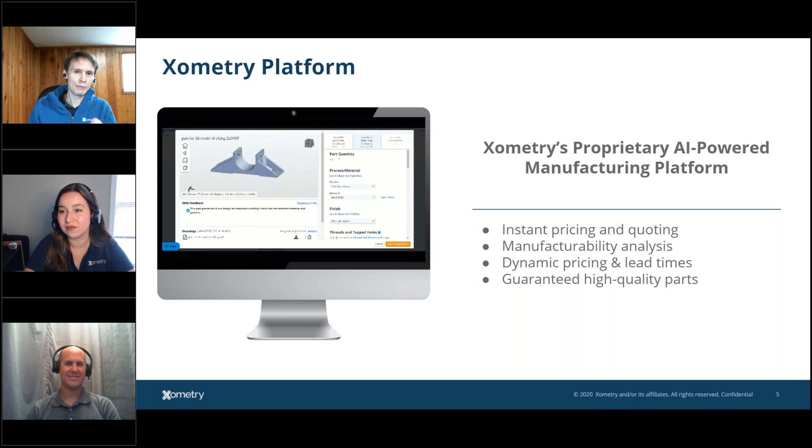So we guarantee the quality and timeliness of your parts. The way that we do this is really unique. We actually have a marketplace of professional manufacturers distributed across the US that we have vetted through Xometry's online platform. So we have shops that are small and large. We have machine shops. We have tool and die shops. We have 3D printing bureaus. And we're able to match the needs of your work, so what makes your project most successful, with those manufacturers that are best able to complete that.

When it comes to injection molding, that could be a bridge tool, so shops that like to do these lower volume bridge tooling designs. That could be prototype tooling, or that could even be full-scale production tooling with the gamut of qualification needs that you need to make your project successful. We have this diverse distributed network that allows us to take on multiple projects at a time and multiple projects in parallel for you. So we can really do a lot of work, not just from the diversity of experience, but also concurrently for your project needs.

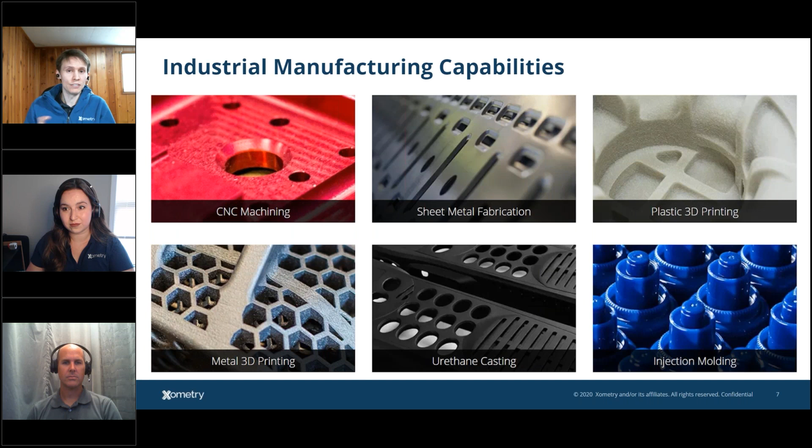And this goes down to machining, sheet metal fabrication, plastic and metal 3D printing options. In fact, for 3D printing, we have 7 different 3D printing technologies available. So if you've used us for 3D printing, you may have seen that gamut there. Urethane casting, and of course, injection molding services. So today, though, it's about molding, and we are happy to talk about it. So I'm actually going to bring Kyra in now to talk a little bit about this experience with molding with Xometry. Kyra, first off, why would I choose molding? And then, what makes molding with Xometry such a good experience?

Oh, Kyra, let me get you. Okay, can you hear me now? I got you. Okay, sorry about that. I think we were both clicking on mute at the same time there, so it's like a door lock incident.

No worries. So yeah, like Greg said, we are talking about injection molding today. As Serena noted before, my background is specifically in molding. I've studied it for several years now, with some background in automotive and everything like that. But I'm happy to bring my experience here and discuss with you guys some general tips about molding. So all in all, injection molding is the cheapest process for a high volume run of parts. Over time, given a simple cost analysis, you'll see how it compares to a process such as 3D printing or something else that we may offer on our platform as well.

It is the most consistent and reliable process over time as well. It is the most repeatable in regards to holding tight tolerances, even to the extent that you don't have to have an operator standing there for every cycle, depending on the part complexity and geometry. So, all in all, it is a repeatable, high volume, scalable process. Even mid to high volume. I know here we offer some prototype tools as well. If you need certain material requirements or properties that you need to test for your application, or just want 100 parts here and there, we are happy to provide a solution for that as well in regards to molding.

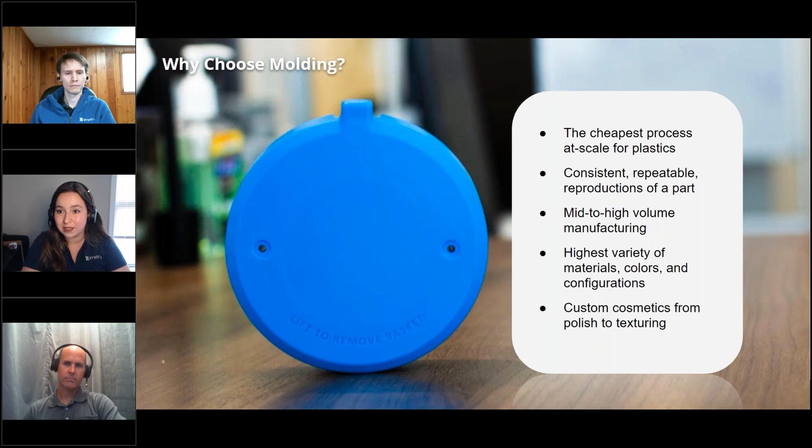Yeah, and I'm getting a little bit ahead of this, but one of the most common questions is, do you mold X material?

And our answer is almost always yes, because we are actually sourcing these materials specifically for you. And I know I'm segueing into that, but that is a question I get very, very frequently: do you mold X? Yep, yeah, we do. Absolutely. And that kind of steps into our have it your way approach.

So with the material, we don't have any material limitations. As long as it's available in the manufacturing location, we are able to source it. There should not be any issues there. We are not limited to what's shown on our website. We can source just about anything to fit your needs. So that is definitely a privilege that we have and definitely take pride in.

But along with the have it your way approach, there's really no design limitations or restrictions that we have in place either. All we want to do is help your part be more moldable, and we want to get it as close to your design intent as we can in regards to producing a part, to make your dream come true, essentially. I know that's a little bit cheesy, but it's true. So we pride ourselves in taking it from start to finish.

So we do offer long-term solutions and not just prototyping as well. So if you do scale up at a very high rate, we can offer those services too. Just taking it from a design intent, like I was saying, to 3D printing, to now low run injection molding to get all the bugs out. And then we can also support the high run volume as well.

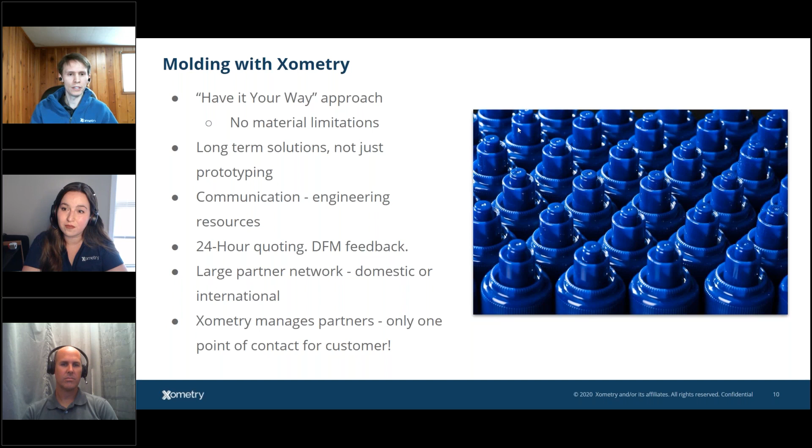So one of the things, and I was speaking a little bit about this with Kyle earlier, is we're about to go into design. My experience has always been: know the process first, and it's going to help you get more intuition about why these design principles are needed. So Kyle, we have some slides set up here, and I was wondering if you could walk through just some of the basics of molding.

Absolutely, yeah. So obviously the biggest thing is to understand what is going to happen and when it's going to happen, so that you can be informed of the whole process. Every tool is cut, every tool is designed, as Kyra mentioned, to your part. It's not an off-the-shelf part. Everything is custom made, and it's not just to your part, it's also to that specific material. So with the thousands of materials, you could have several different options in your tool requirements.

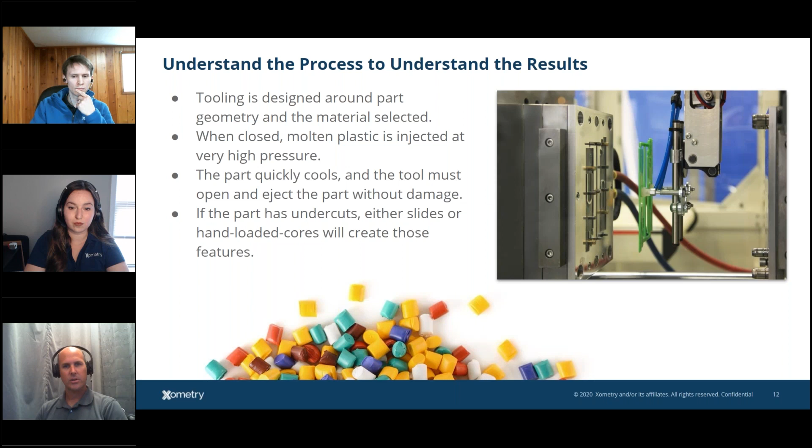And I got the little thing here. I'm gonna skip ahead. Perfect. Like 1, 2, 3.

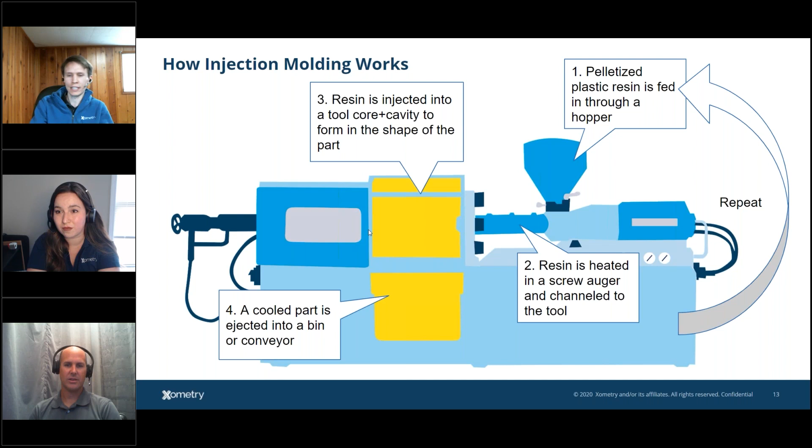All right. And this becomes important because we have some other things talking about what adds to the cycle time, because that really is a measurement of throughput, right? So how many can I produce per day, and what can we do to make more parts? Absolutely. Yeah, and there's a lot of terms you're going to hear.

I mean, not just from us, but from anybody. You have single cavity tools. Obviously, single cavity meaning one part. So every time that mold opens and closes, one part's going to pop out of that tool.

Family tools itself, it's a good, easy way to maybe keep that tool price low. Sometimes you can put 5, 6, 8 designs into one big tool. Sometimes you can't. It just depends on the geometry. But it's, again, a good way to put all designs into one tool. If it's different sizes, you may have to have a runner shut off, so only one part will run at a time. So you're not really necessarily saving on your parts, but you would be saving on the tool.

Multi-cavity tool, so again, if you're going into high volume, if you're needing call it hundreds of thousands or even millions of parts, you're going to want to look at high multi-cavitation tools, 2, 4, 6, 8, 16. I mean, there's a lot of variations on what can be done with these multi-cavity tools. As I mentioned, the side actions or slides, again it's a mechanical component that actually captures holes in the side of the part, that's not something that's captured in that direction of pull.

Gating, again, that's kind of where material itself is actually injected into the tool, into the part itself to help fill it. That vestige that's left over, that little piece of plastic that's hung out on the part, has to be trimmed to leave you a nice finished flush part.

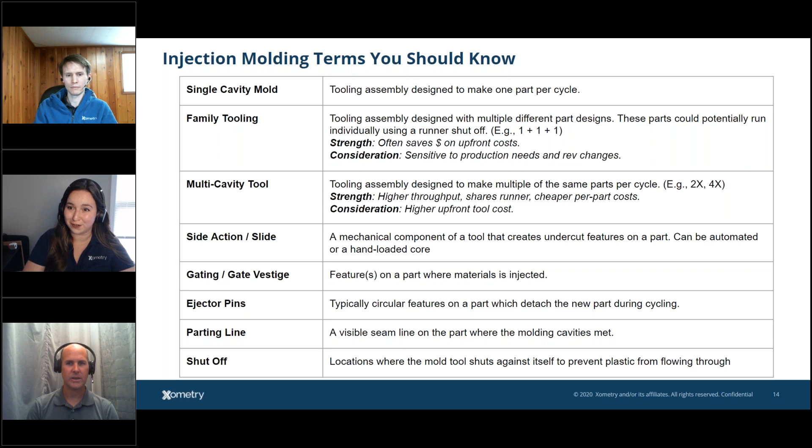And at the same time, sorry, Greg, it's important where the gate goes, because it depends on how your part fills. So it's very critical where it goes in regards to what you want your part to look like afterwards. So one, it's critical with how the material flows, and two, it's ultimately your discretion whether you approve of the location that we choose. And I know we have this question a lot too, especially when we're talking about that prototype or bridge tool versus a production tool.

So we made this little graph, but just when would I choose? First off, what are hand-loaded cores versus automated slides? Why would I choose either? Or, what will we do to help recommend the right approach for you?

A lot of that will depend on how many parts you're actually going to need during your run. If you're needing hundreds of parts at a time, hand loads could actually be a better benefit for you. But if you're looking for a true production, you're needing thousands of parts at a time, maybe need them quickly at a certain time frame, that's where the more automated slide would come into play.

As far as what a hand load is, the picture is actually a pretty good depiction of loose pieces. That's really what it is. It's a loose piece that gets fit into the tool, and as the tool opens, that loose piece is stuck onto the part, and an operator will stand at the press and remove that hand load, which is still part of the part. It's then taken off the part and installed back into the tool.

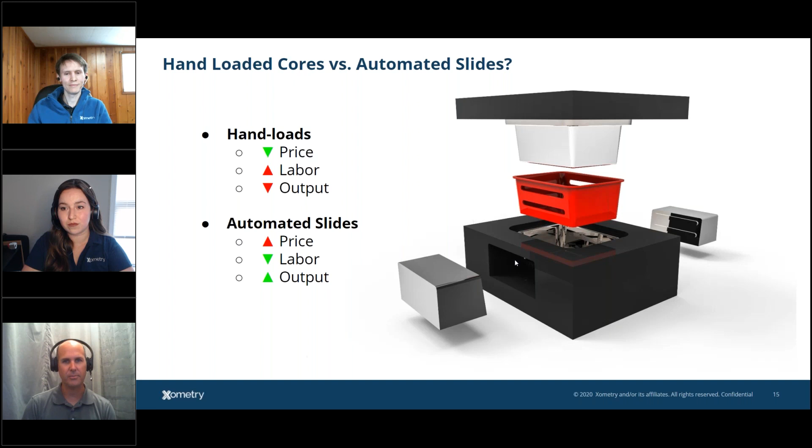So the reason we want to bring up the tooling and tool approaches is because you're going to be flowing molten plastic into this cavity, and this cavity is in the shape of your part. A lot of weird things happen when plastic flows into parts and then cools down. First off, hot plastic is expanded. When it cools, it shrinks down. So when we talk about design for manufacturability, a lot of that is around that plastic and how to mitigate some of these costs, including what Kyle mentioned with hand loads.

And we have this molding trinity that Kyra has emphasized over and over again. So Kyra, I'm going to let you take it from here: undercuts, uniformity, and drafts. Sure. If you want to take anything away from this call, take this away. This will help with all of your designs. It's applicable to every single injection molding design out there.

Any part you can buy off the shelf, any part you'll see in a car, any part you'll see anywhere, all of these 3 analyses apply to that. So what you're seeing on this image is the basic 3 analyses that we do and offer with every single order that we get through our molding department here at Xometry.

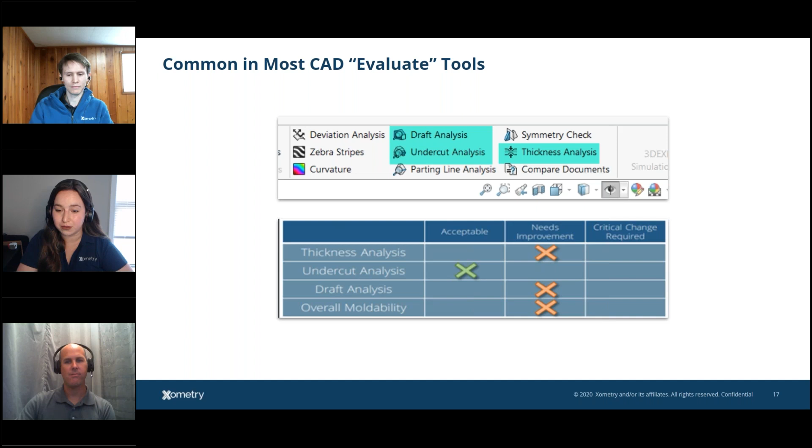So the first one is thickness, that you're going to see in the little checkbox down there. This is just a snip right out of our DFM feedback that we offer to you. So thickness analysis, undercut analysis, and draft analysis. We identify those, and then we identify the overall moldability of the part.

So the first one, actually in a different order here, is undercuts. What undercuts are is basically a feature that is perpendicular to the parting line or the direction of draw. You can see in that first image, it's that red circle. Same thing Greg is pointing to there in those red faces. We've done just a basic undercut analysis on that blue face, and it calls out everything that's in the opposite direction, essentially.

So what that means is, like Kyle said before, either a hand-loaded core or side actions are needed to form those features because they're not captured in the direction of draw. We aren't limited to those whatsoever. Xometry can absolutely handle most side actions and undercuts out there. That's no problem. But we do encourage you to evaluate your design and eliminate any if unnecessary, just because they do add some cost to the part. And of course, we want to make it most cost effective for you.

In most cases, like I said, they are achievable. However, in some cases, a die lock condition is encountered where basically there's two different side actions going together in different locations, and you can't really pull them out at the same time. So it creates an intersection where they're kind of locked in place. So that's what a die lock is. And that is not achievable with those standard actions that we talked about, so that is something you want to avoid.

And whenever you're doing these analyses, you can see where all the red marks show themselves and reveal where you're having an issue. That's the benefit of the software we have here in-house. We can call all of that out, and there's really no limitations there. So the best practice would be to minimize those: one, because it does reduce the cost, and two, it just makes your part a little bit easier to mold. And then something that's really awesome that we stress a lot are pass-through cores.

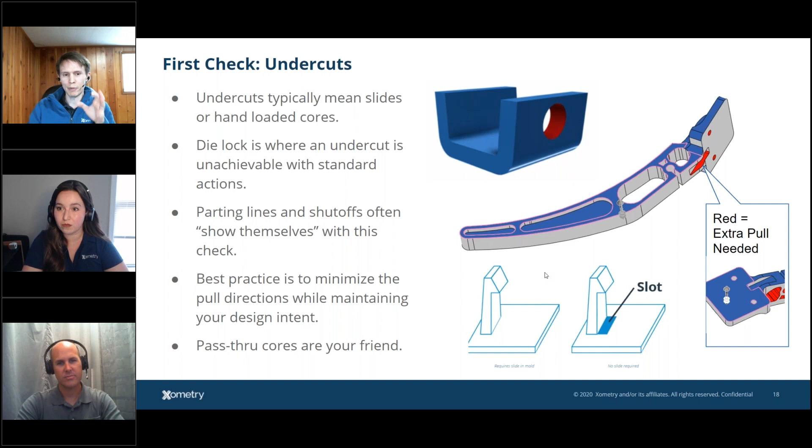So it's a really good way to save costs on your injection mold design, by mitigating as many undercuts as you can. And there's some really great tips out there, including some of the stuff in our design guides.

So one that can result in a sink. Like I said, a sink is just a minor indentation on the reverse side of the part that just shows, kind of reflecting the features on the opposite side. You can see these in your common plastic totes or garbage can or whatever in your house. They are present there. They are not detrimental to the function of the part whatsoever, unless it's very significant, and I'll get into that a little bit.

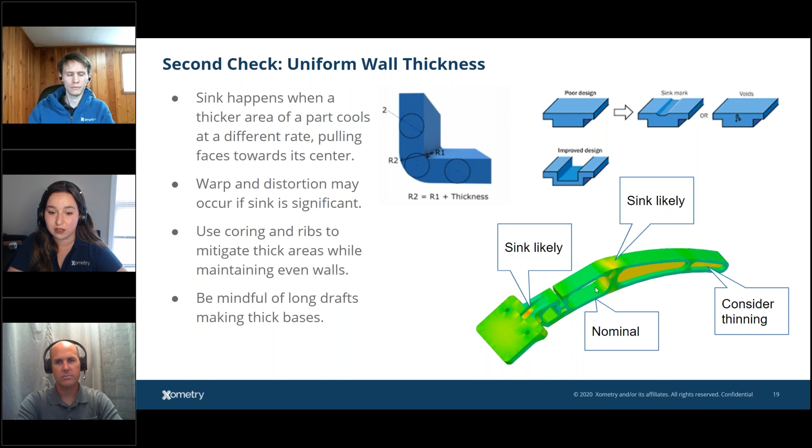And sink happens because basically it's your material shrinking together. It's pulling away from that surface because there is that big thick section there. So like I said, if it is significant enough or severe enough, it could cause warp, which could obviously be detrimental to the function of your part as well. So in order to mitigate those risks, we want to reduce the thickness of those areas and core out the features. You'll see that as well along this part that we have here.

So the last check that we want to do is a draft check. What this is, it provides ease for ejection. And we do that by just applying a minor angle to the outer walls of the part, as you can see in those images too. We need this to release the part from the tool because it creates a vacuum and it's really hard to pull off without it. If it's not there, it could result in drag marks or scratches to the surfaces of your part. And we obviously don't want that for your design.

Ideally, we like anything above 1 degree, just because more is better. But at Xometry here, some features we can get as little as a ½ degree of draft. But again, more the better. And you can see in the image that all the yellow surfaces on that leg there require draft. It either should be red or green.

Yeah, and in this image, by the way, the good news about a lot of these analyses is they are available in most professional CAD platforms. So if you're already designing in SolidWorks or Inventor, you're going to have access to at least that undercut check, draft checks, and there may be a thickness analysis. These images here are basically taken from a standard edition of a professional CAD software.

We highly recommend using that as frequently as you can when you're in the design process, especially when you're taking something from a 3D print to a mold, because thickness is going to be one of those first things where you're going to be like, hey, I don't need all this extra mass anymore, because you're not going to be changing infills and stuff on your part, and it's very easy to assess.

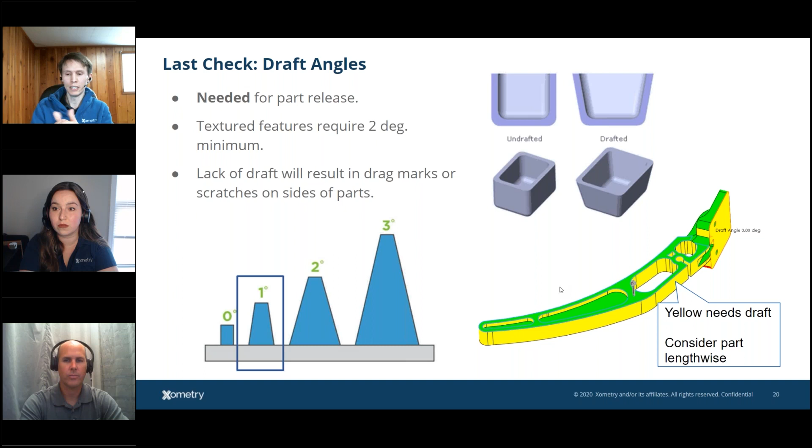Our team takes a further step, and we do more sophisticated analysis as well once we move into a finalized DFM on the part here. But I did want to say, these tools are common. A lot of times it's just knowing where to find them in the Evaluate tab of your professional CAD, but super, super useful to know where to check for those.

Mm-hmm. And this is kind of putting it all together. This design is actually a little drone leg that we use, and we print a lot of these here. But in this case, you're checking undercuts, and you're kind of looking at both sides, and you realize this is going to be a good center part. So if you imagine the tool closing and creating both halves cut into the tool, then this feature here would be created using a slide or side action.

But this part was put on a diet. Some coring's been made to remove some material, and all of a sudden your design's that much better for molding.

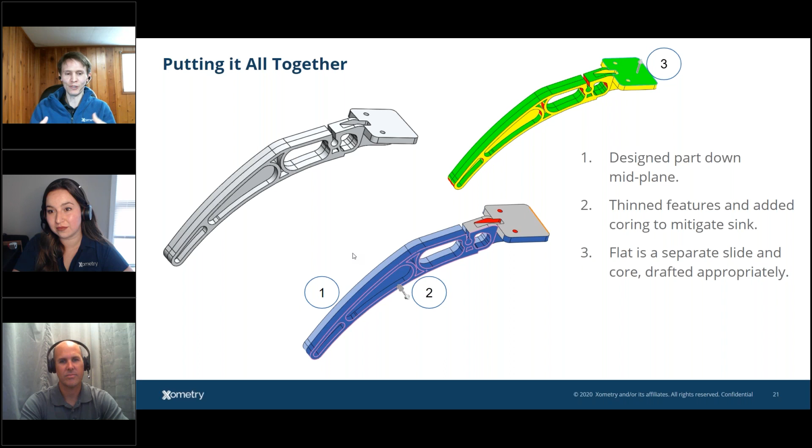And one of the things we want to emphasize is we can inject plastic into your original shape, but the outcomes of that are really large dimple-type features from that sink, and there's a lot of outcomes that we don't want you to do. Our goal is your success. So when we're talking about these design considerations, it's not a critique of the model. It's us thinking about those future outcomes when we're molding these parts.

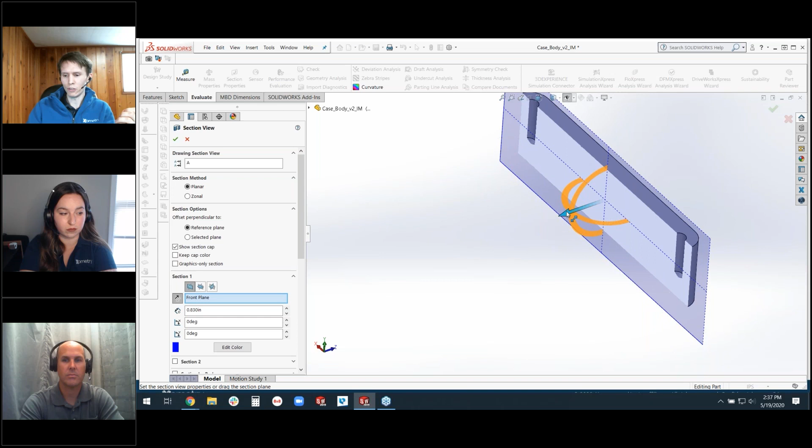So when I run an analysis on this, I'm going to very quickly see that I have some really thick, uneven walls here. If this was just straight molded, you would find sink almost to the point of deformation of the part. The pull of the sink may actually change the overall geometry and function of the part. So what you want to do is start thinking about how can I turn this into a more even wall thickness. Again, this is just the beginning.

This example here would be, hey, I have this part, I've made a dozen of them, now I need to make 700 of them. So how can I get from that dozen to 700 parts? So one of the first things I may do is take a look at what my functional side is. In this case, I have everything attaching from the top here. So I want to think about how can I remove material from the non-cosmetic or non-functional face.

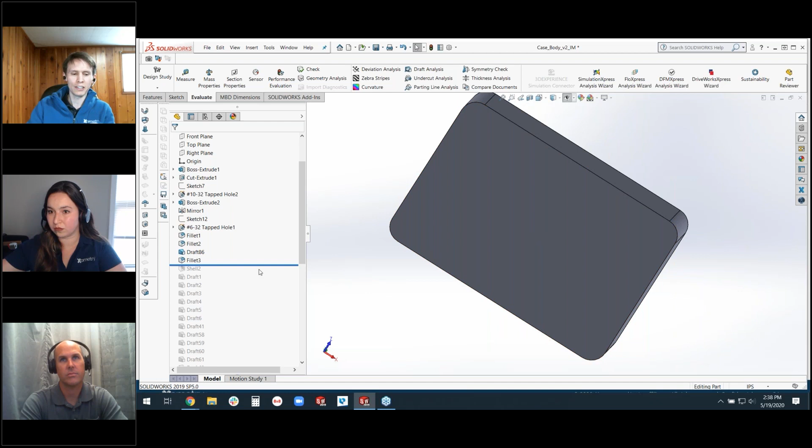In this case, I ran a simple shell command. Running shell across this all of a sudden gives me an even wall thickness across the entire part. And I'm already halfway there in making a part that looks moldable. When we talk about the next steps, it's about looking at my draft. I could do a very quick draft analysis and realize that, hey, right now I have 0 degrees on my pull directions.

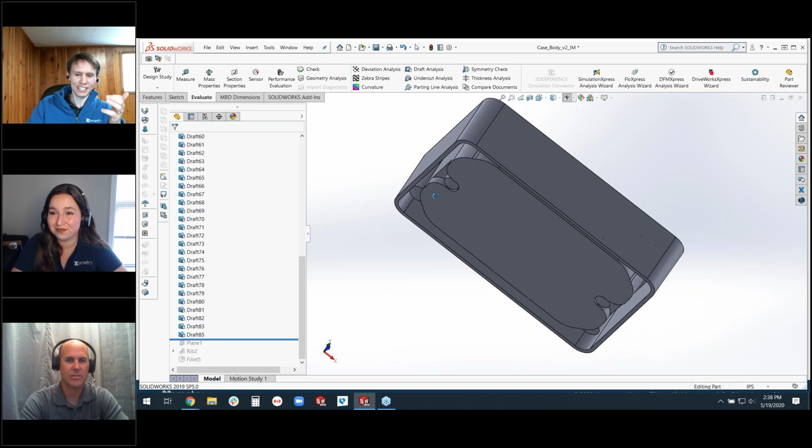I have already done this, because in SolidWorks I'd probably crash the computer if I didn't do this beforehand. But I've used a draft wizard and some manual additions here, and it's just very minor. But now I have draft in the pull direction so that this part will appropriately release after the tool's closed and plastic's cooled. The second that it moves a little bit, I have an air gap between my part and the tool that helps it release successfully. So applying that draft is very important.

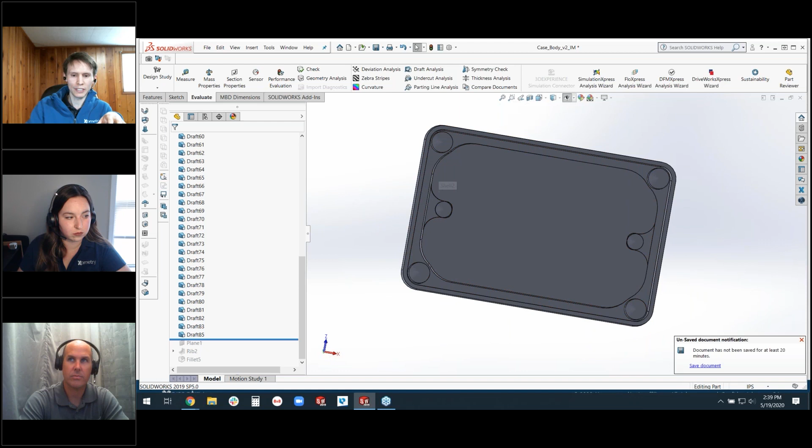The other things that I took a look at: so I do have this part. It is on a diet. It's got even wall thicknesses. A lot of times you want to stabilize a boss or a protruded feature like that. So I added a rib command, and now I have a little bit of stability on these, so since this is the install point, I may need that to be a little bit more rigid, especially if it has something installed to it.

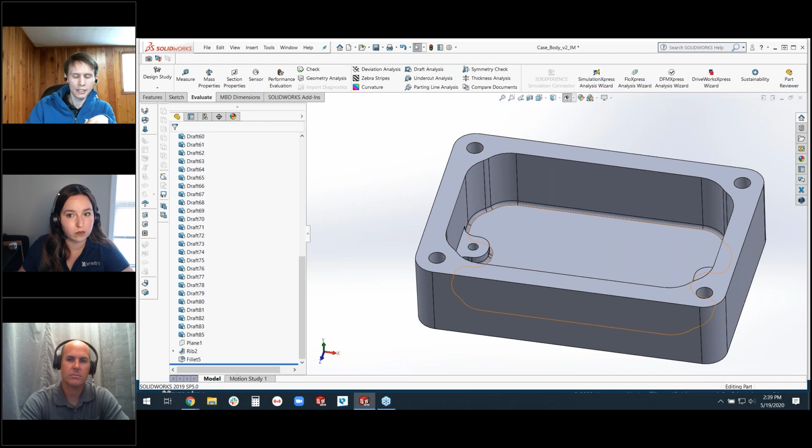And then the last thing that I have is adding some fillets, which, just like draft, help the release of that part. So in some very simple steps, I've taken something that would be very difficult to mold initially and brought this design to a point where I can do some limited scalability via injection molding.

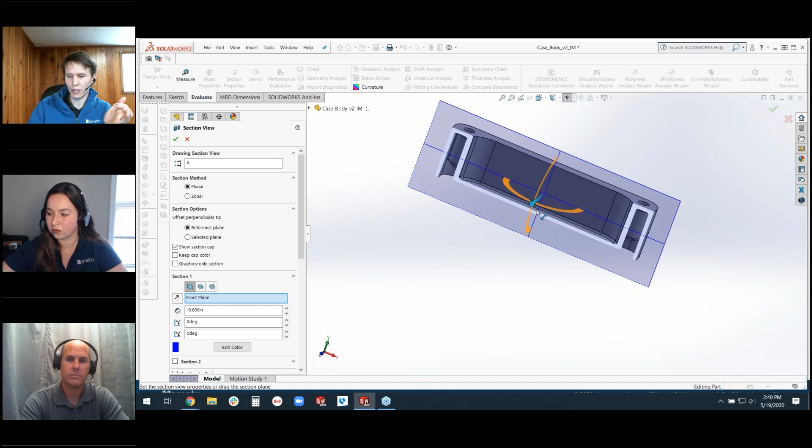I'd really like to show this example because it is something where it starts that mentality. The next steps of this is I may go back and take a look at this and really critically think, do I need 6-32 tapped holes? Do I need some of these external faces, or was it just convenient to grow this without supports this way? And you could start thinking about how your design may change and be optimized even further for molding.

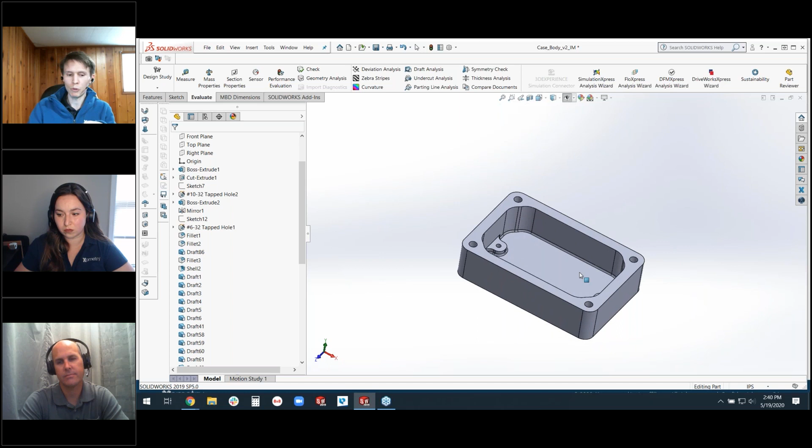But this design here, just some very simple things like using those shell commands, adding those drafts and some ribs when needed, especially across cored areas where you want to reduce flex. So adding some ribs for stiffness versus adding mass for stiffness are just some huge improvements on the moldability of your design going from 3D printing to injection mold.

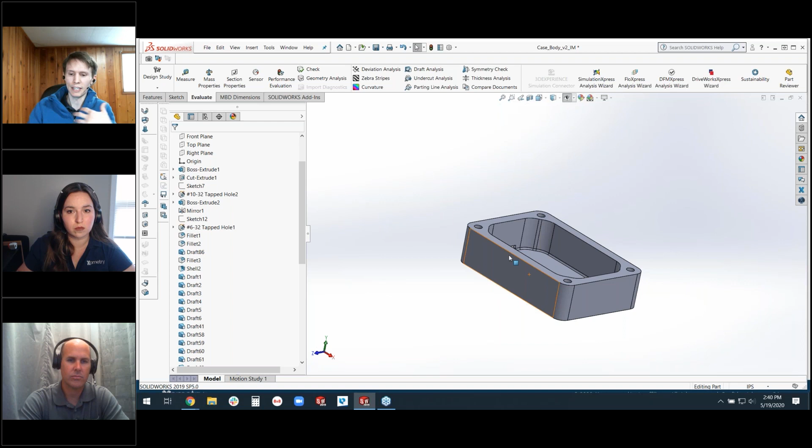The other thing, Greg, is obviously moldability is one thing, but you're also saving money. You're removing a ton of material, and you're also removing a ton of cycle time by doing that core out, which is usually what people care about the most sometimes.

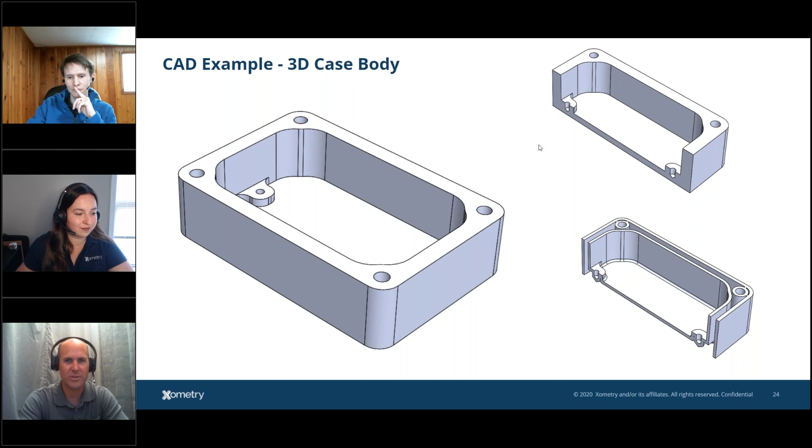Great. Yeah. All right. So Kyle, did you want me to run through this, or do you want to run through some of these tricks here? Yeah, you can go for it. I have a couple more tricks of the trade that we've learned along the way.

So one of the things we're talking about is a boss, which is essentially this extruded column, usually accepting a screw, so some sort of threaded feature. Sometimes it's accepting an insert as well. One of the things that's very common with boss design is you see a see-through, donut-shaped impression on the other side once it's molded. This boss trick, I wish I knew it years ago. I know it now, and it's an exciting little trick.

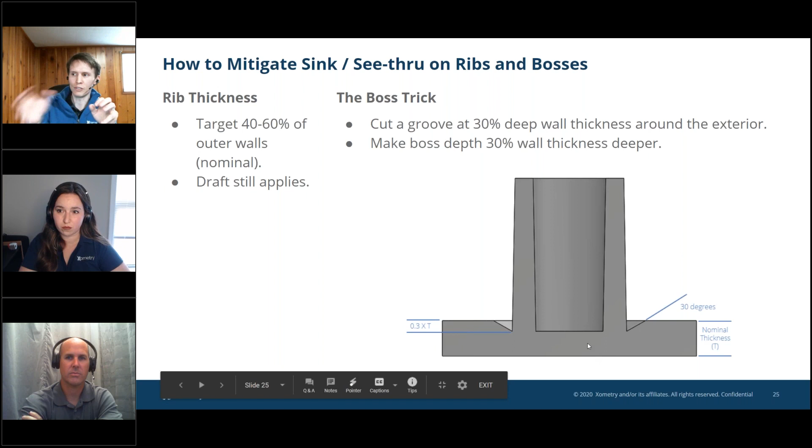If you think about this as your nominal wall thickness, if you go about 30% down and do about a 30-degree cut and essentially have a revolve cut around your feature here, it tricks the sink, if you will. Right now the mass from this column would be pulling from this wall, but by making this little cut, it will significantly reduce the amount of stress pulling on the cosmetic face and reduce that O shape. So a little tiny cutout ring around bosses can be very good for reducing that see-through sink.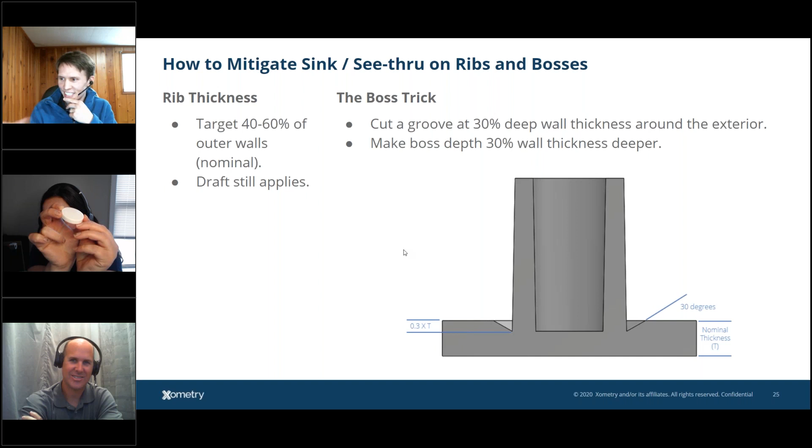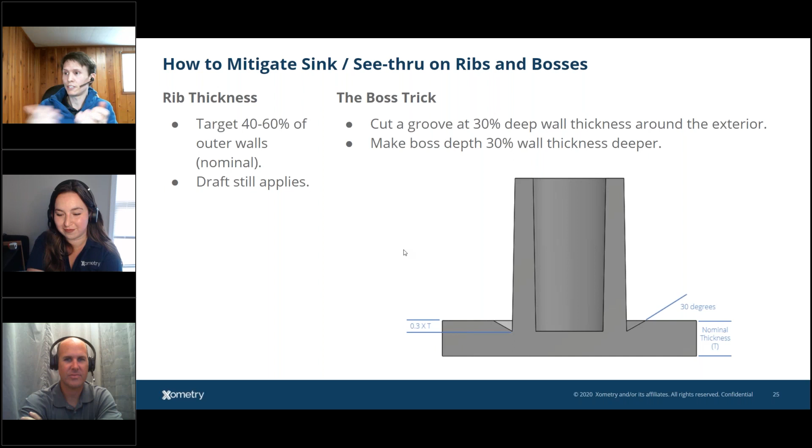Yeah, and this is something we're talking about with mold texturing. High gloss items will show everything; they will reveal all, even ribs that are specifically designed. On the first run you may still see a very fine sink line, and if you start looking around at parts all around you, you're going to see some of those very fine sink lines. It's not affecting the mechanics of the part, but it is just something to be aware of. Right.

And even at the very beginning, we had that blue part there. That blue part has a mold texture, I think an MT1020 mold texture. There actually is a slight ring, but because that texture is there, you can't see it unless you're holding it in the right light. It's almost invisible, because just by changing the texture of your tool surface, which transfers to the part, you're all of a sudden hiding some of these cosmetic variations.

One of the things we get asked a lot is, do we do insert molding and overmolding? Yeah, we absolutely do. And what's cool about us is we're also a machine shop and a sheet metal fabricator, so we oftentimes will also mill the insert. So a stainless steel insert for a strain relief with a TPE overmold is something where we can actually do the whole kit and caboodle.

So we could take an off-the-shelf item and overmold over it. We can custom manufacture that item, or if it's a non-electronics item, we could also take your provided item and create a tool to overmold on those.

I know we also do overmold projects, so that would be where you make typically a rigid shot first, and then you do a secondary shot. So think a toothbrush handle around that. And I just know there's some chemistry behind that as far as adhesion, where you have to build some mechanical design sometimes for adhesion. But yeah, ABS plus TPE is very, very common there. And we can answer some more questions about insert and overmolding as well if you have them.

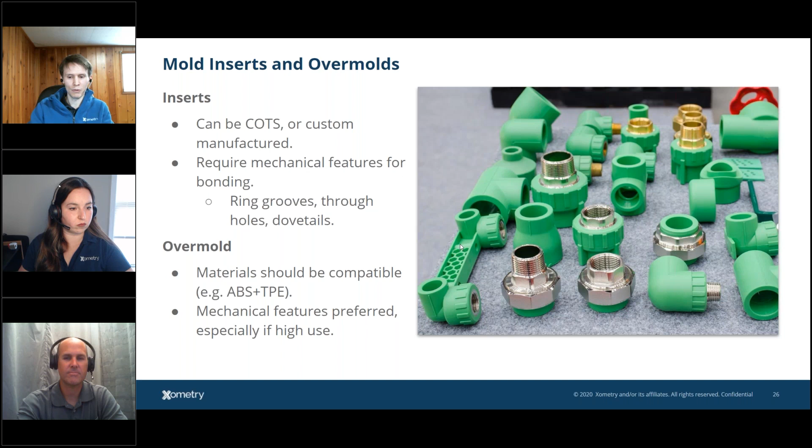But I did want to get to some of these questions that we have. Other considerations is if you have external threads. One of these very interesting designs is where a male thread can actually be molded if it's kind of right on the parting line. So you can actually do an undercut analysis and look on each side and find that actually it's very forgiving for doing that. Something to notice, you will find a small parting line here when you're molding in threads.

Not too bad with coarse threads, but finer threads, sometimes you may want to think about doing a very fine cut on the place where it's going to part, so that those threads do not interfere with their mating component. There's some cool little tricks that you could do there. But if you ever look at some of these molded threads and you see two flat sides to it, that's actually a trick to help mitigate any interference with that parting line.

And going back to kind of inserts and hand loads, Kyle, I'd love to hear on this, but my assumption right now is that if you're doing something low volume and I have a female thread, I'm usually using a hand load to cover that, right? Versus like an unscrewing system. Yep. Yeah. I mean, again, that could be ejected with the part and then manually just unthreaded. So like the gray and the blue parts there in the picture, those could be formed by just a simple unthreading action of the part and then put right back into the tool. Awesome.

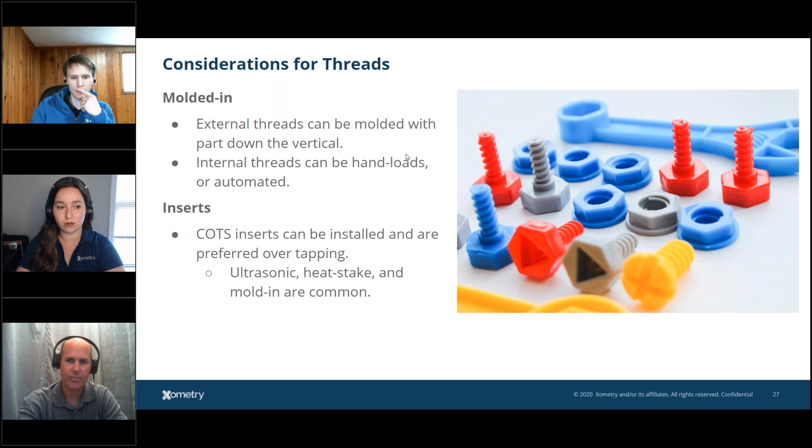All righty. So, real quick, Greg, to maybe tie into that, some of the inserts. So the other side that we have to consider a lot of times is if it is just say a brass insert. A lot of times we may see designs that have 15, 20 inserts, and we don't always want to insert mold those just because of the time it takes to physically load each insert onto the tool. The other great thing is that we're not limited to one process. We can do heat stake inserts as well as pressed-in inserts, overmolded inserts.